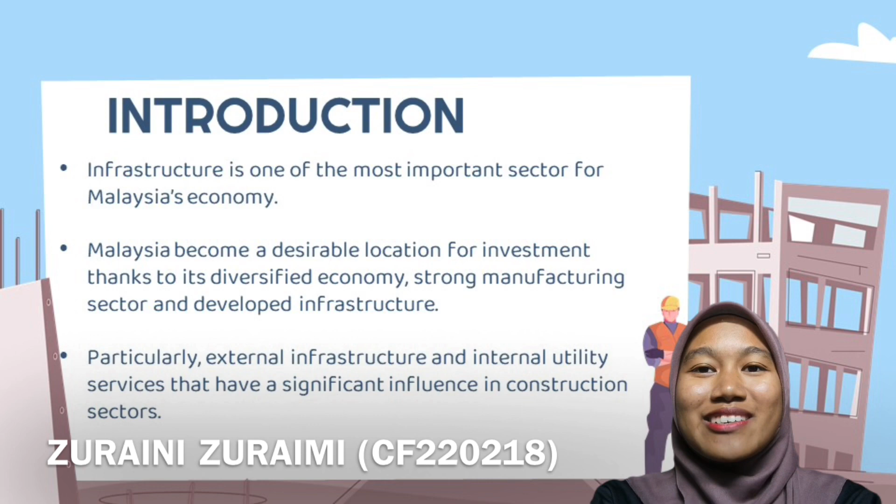External infrastructure is divided into several parts such as sewer system, manhole, water piping system, road and drainage system. It has also provided transportation engineering system, utilities, water treatment or local services to some places or specific locations and areas. Next is internal utility services that can be divided into electrical piping system, sanitary and toilet system, also water piping system and water tank.

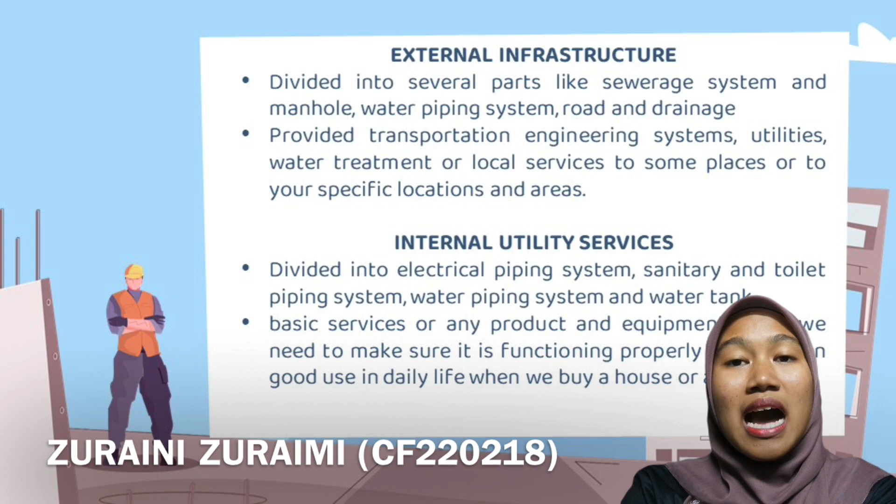It is a basic service or product in a house or building that needs to function well for our own use in daily life. External infrastructure is important to offer stronger protection against flood and other man-made and natural disasters. Furthermore, it is easier and faster to transfer resources and services from one place to another, and to make sure water can be transported efficiently from the sources to all locations.

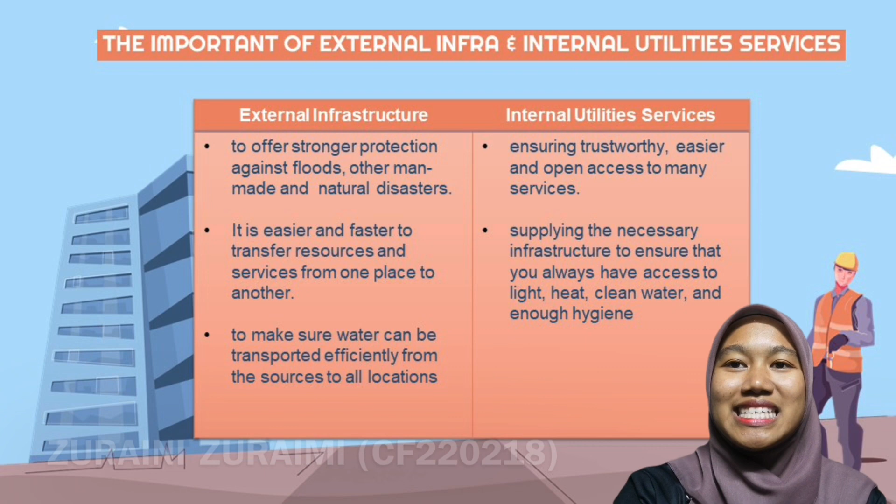For internal utility services, it is for ensuring trustworthy, easier and open access to many services. Also in supplying the necessary infrastructure to ensure that you always have access to light, heat, clean water and enough hygiene. Today I want to present the construction stage of external infra and internal utility service.

For the construction stage of external infra, the first step is planning the design and site investigation to identify the ground condition which might affect the proposed development. After that is selecting the best contractor, because this will affect the development and success of a construction project. The wrong choice of contractor might cause issues including poor work quality and project duration.

The third step is the site visit and site preparation. It allows the officer to obtain a better understanding of site condition and can remove obstruction for ease of access. The next step is excavation. Excavation works help to build the foundation on which a building or anything will be constructed.

Step 5 is installation, just like a machinery plant is placed in position or connected for use. Material testing ensures that the project will be successful before the foundation is laid. Without this testing, builders and engineers will not be aware of the quality of the surface and materials and whether they will meet the project requirements.

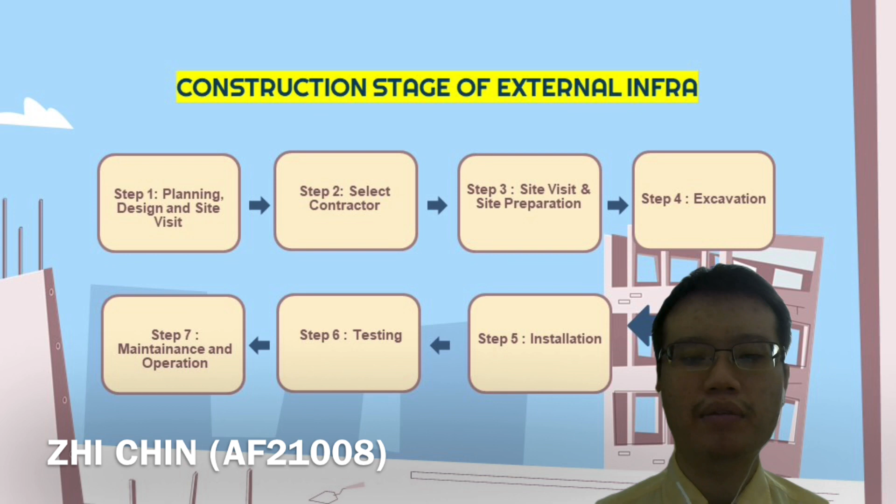Finally, we must do maintenance and operation because it can improve the effectiveness and efficiency of maintenance. Whereas for the construction stage of internal utility service, all steps are the same as for external infra. That's all for me. Thank you.

I will explain the drawing details for construction of infrastructure. Assalamualaikum. This is my drawing diagram that I have drawn during my part-time work and industrial training.

First, I will show you the drawing for external infrastructure such as heavy-duty manhole with section, isometric for pipe culvert, road map used to plan a project, and an example of proposed drainage work with detailing of the drain.

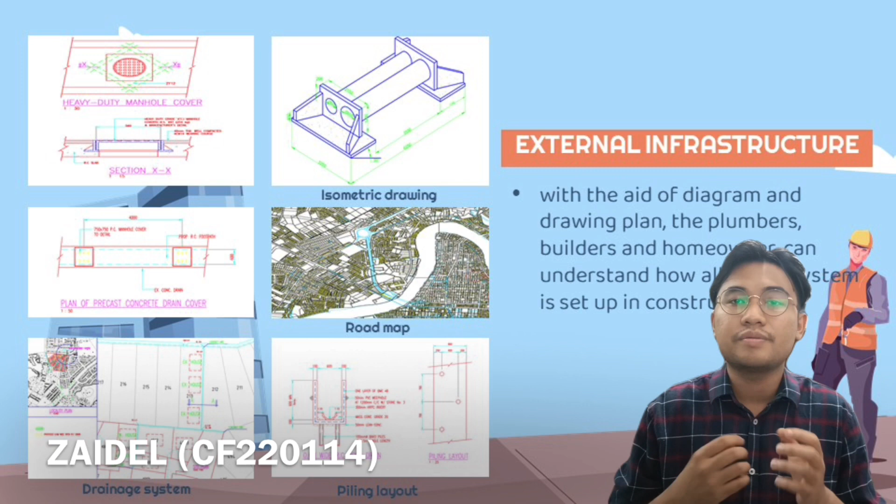As for the internal utility services, I have the opportunity to draw a simple plan for electrical piping in a layout plan, also with symbols of electrical parts to indicate them in the plan. As you can see in the slide, such as a switch to turn on the light.

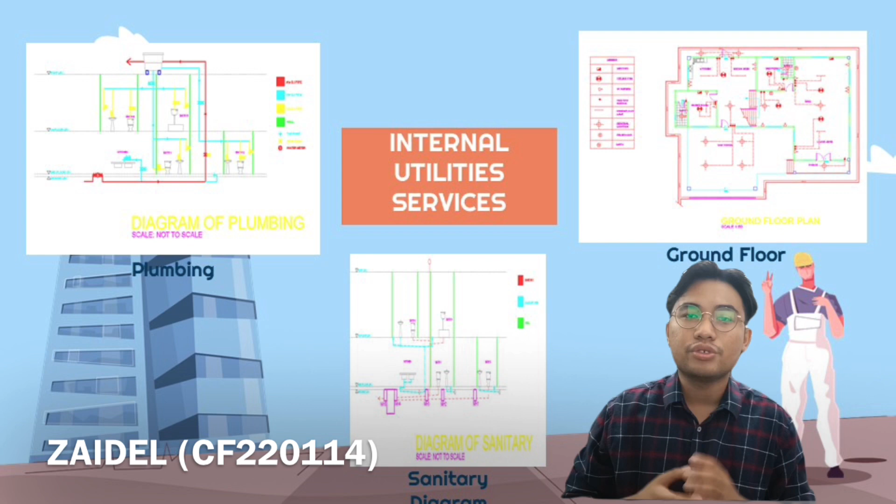Beside that, a diagram for sanitary that shows a little bit of downward gradient for water flow. And lastly, a diagram for plumbing that shows the flow of water in a double-story house with different layers used to indicate the different distribution of the water flow.

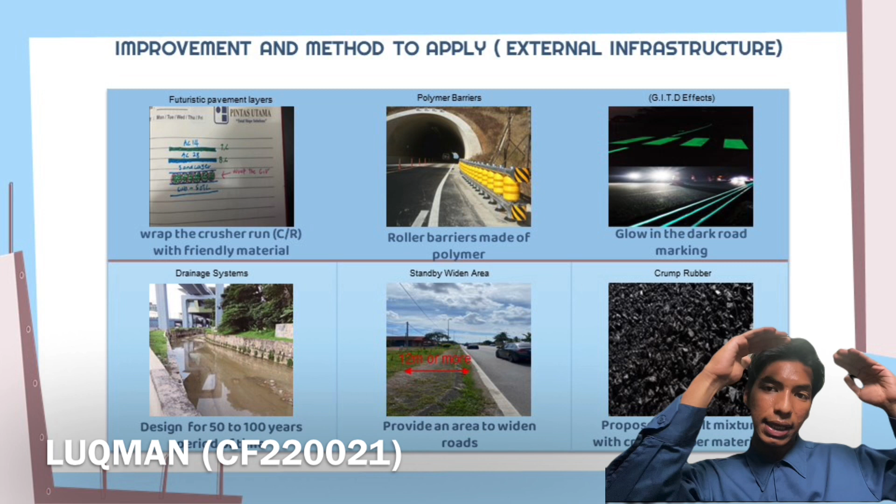Next, polymer barrier. Since we want to overcome road accidents, we propose a roller barrier made of polymer so that the impact for the vehicle will decrease and it will not be thrown off the road. This will improve the safety.

And then next, glow in the dark. Okay, so we want to cut cost for electricity. We propose glow in the dark road marking.

Next, drainage system. Since we know that the water table will increase year by year, we propose a larger monsoon drain, a larger roadside drain, so that we can carry a new capacity of water. Next, standby reserve area for like 12 meters or more.

So the capacity of car traffic will increase day by day, so we standby a new reserve area to add a new carriageway on the left or on the right. And then for the last one, we mix the pavement, mixing asphalt with crumb rubber. This method will reduce the cost of making pavement.

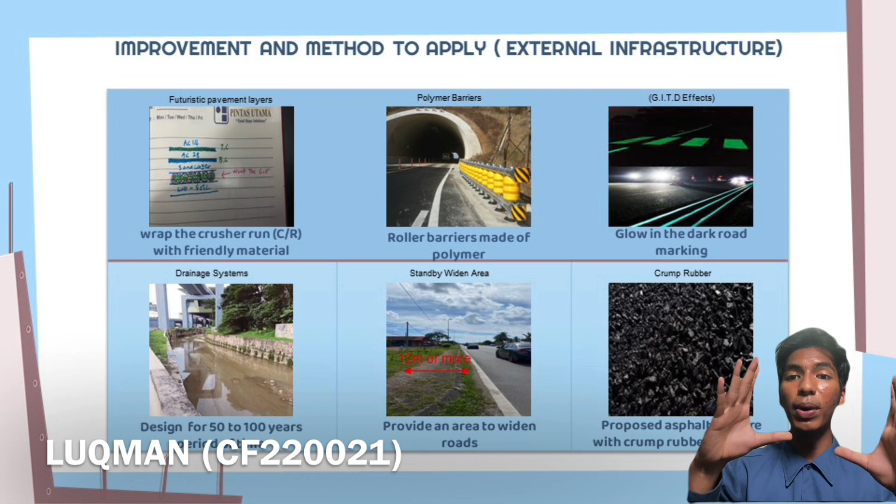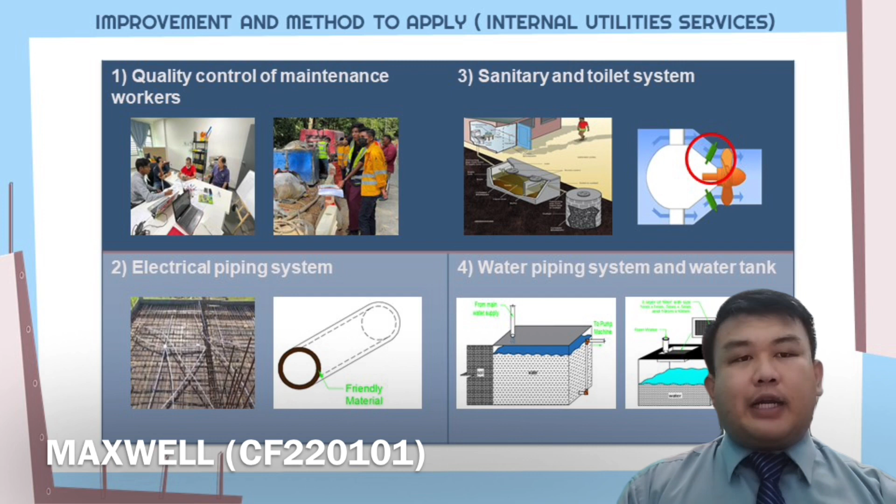In conclusion, in the civil engineering world, there are various methods that are often used to solve problems of defects. We are also able to learn more in terms of technical and theoretical aspects and increase our ability in conducting research in both term writing and application.

Lastly but not least, we can gain knowledge on how to develop new methods to solve the problems. Thank you.